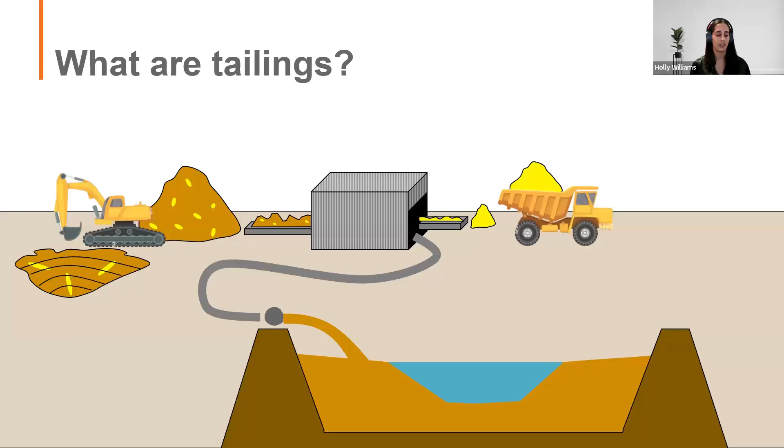So, all of us rely on mining to sustain our everyday lives, right? In order to get metals and minerals that we need to make computers, smartphones, solar panels, etc., we need to extract them from the earth. So whatever the metal or mineral is that we're interested in, in this case it's indicated by those cartoonish yellow specks. We first need to dig it up out of the ground. Then we have to process it to extract the thing that we're interested in and send it off for use in products. But, as you can see, those yellow specks were only a small portion of what we dug up.

And compared to other structures that need to be engineered seismically, some of the key differentiators or challenges with tailings facilities are that we actually build the structural dams out of earthen materials instead of manufactured ones. The stored tailings have high spatial and temporal variability. And the facilities themselves are never finished. They're usually continuously being constructed, raised, modified throughout their operation.

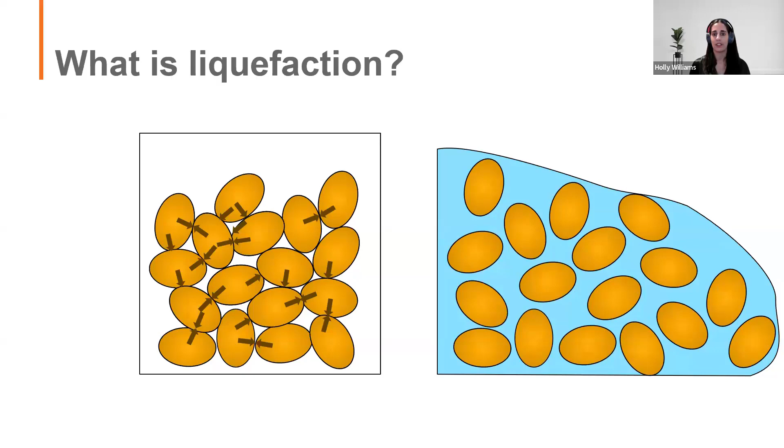But there are also some recent cases of flow liquefaction failures of tailings facilities that have led to devastating consequences. So I'm going to play a video of the 2019 Feijão tailings facility failure. And just to note, this tailings facility doesn't really look like the ones I showed you earlier. And that's because it had actually been inactive for a number of years and was covered and vegetated.

Another thing to note here is that the liquefaction here wasn't actually seismically triggered, but it is quite a unique case because we captured the onset of liquefaction on camera. So let me just press play here.

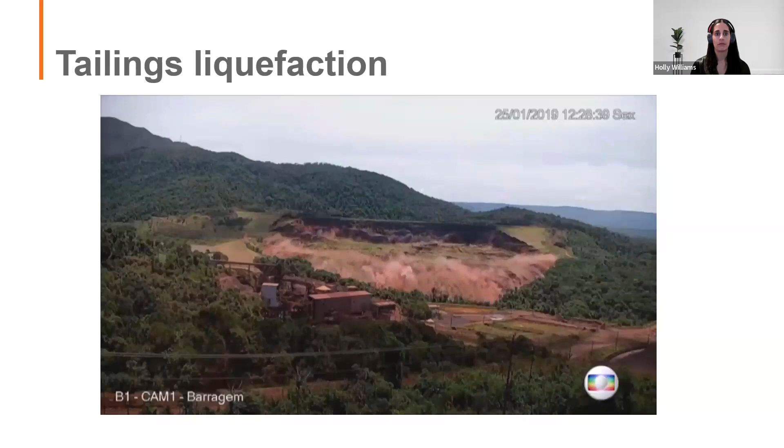So as you can see, this was a particularly terrifying example in the industry, especially because of how fast it occurred. So I think you can see why we're so concerned about this particular failure mechanism.

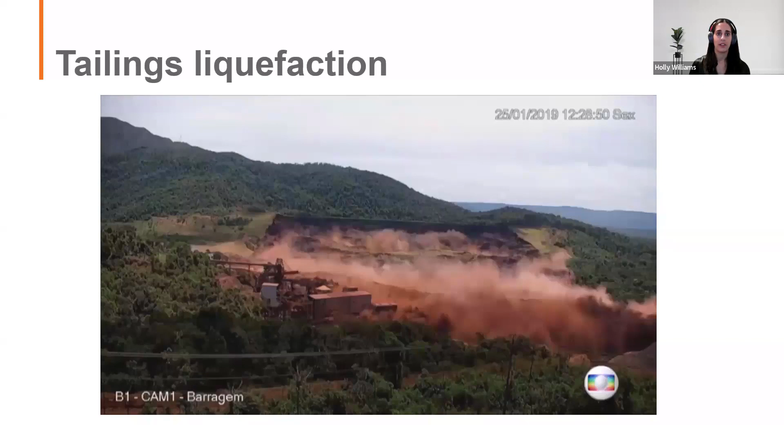And then lastly, some of the most common approaches to assess liquefaction potential in tailings are based on cone penetration testing or CPT. And the CPT is a long metal probe. We start pushing the probe at a constant speed. And as it's being pushed, it collects continuous readings of three things.

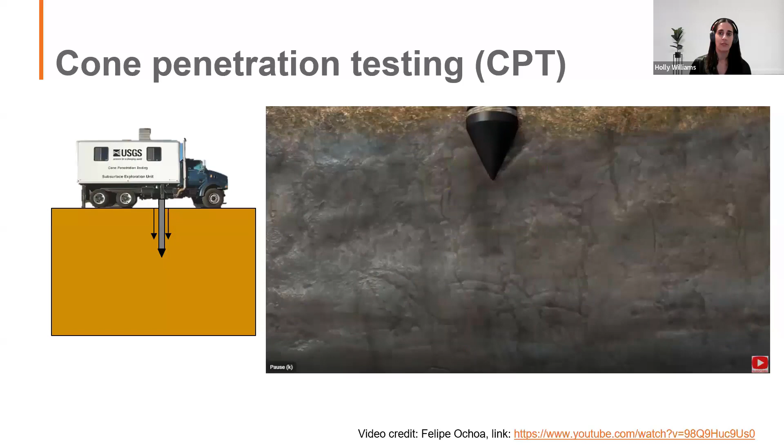Sorry, that video seemed to glitch. I'll see if it keeps going here.

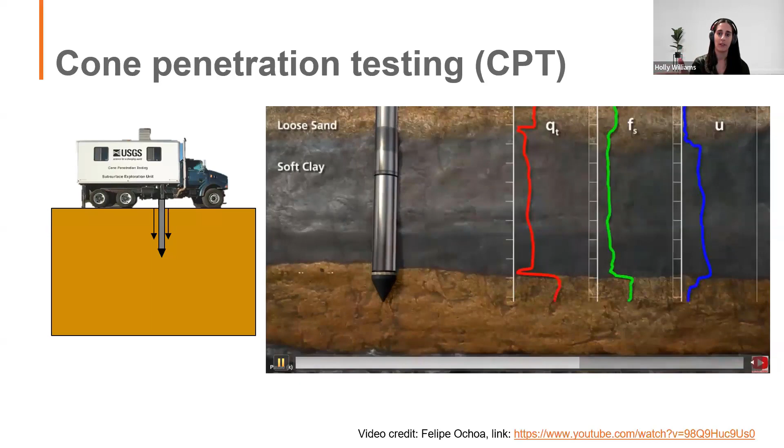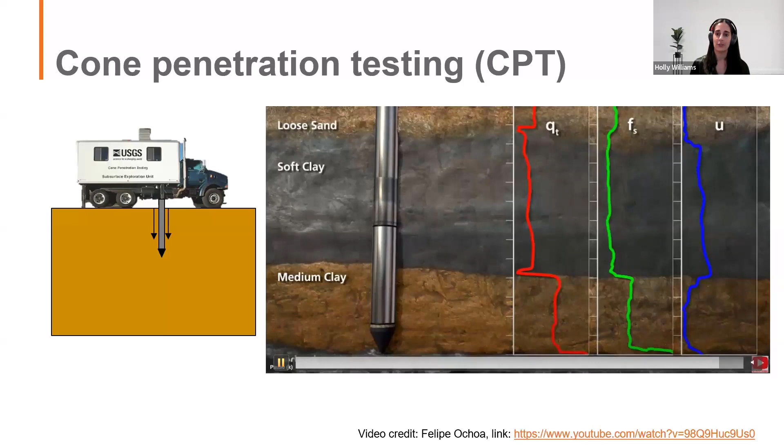Right. Yeah, so you can see how the combination of those three parameters gives us indications of when we're in different types of material. And we can use it to make inferences about its expected behavior. But something to keep in mind is that it does not directly measure the key parameters that we're interested in. So like when we were talking about liquefaction, that might be something like the actual in situ state of the soil or how loose it is.

So instead, what we need to do is rely on a combination of empirical equations and theory to get the parameters that we're interested in. So those are all the definitions, and now we can get into the key idea of the paper.

So for seismic liquefaction assessments for tailings, there are generally two steps. First, you do a triggering analysis to answer the question, which is really, will the material liquefy? And then once you do that, you run stability assessments using liquefied residual strengths in zones that you said were potentially liquefiable, and then verify whether the stability is acceptable. And then the results of both steps are typically presented as deterministic factors of safety.

And another thing to note is I recognize some people choose to vary these steps a little bit. So some people might skip ahead and do step 2 first to verify whether liquefaction is an issue before they even start to think about the triggering. Others include some additional steps or slight variants, but even with those variants, there are still 2 points in the process where you need to apply engineering judgment to select what is the cutoff factor of safety value.

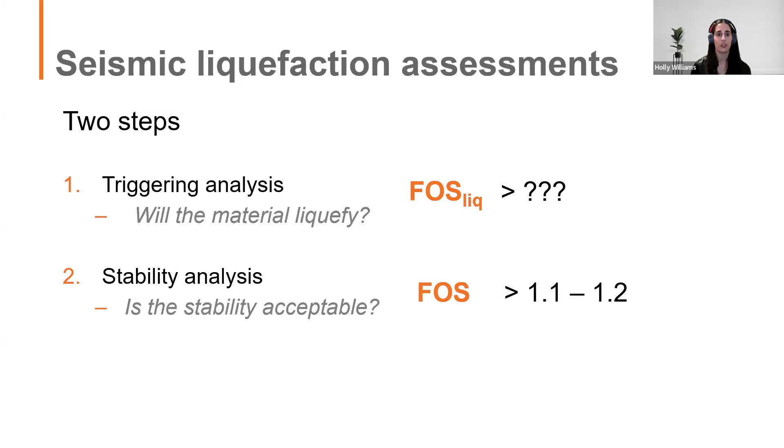We do have current best practice guidance that gives recommendations for factor of safety cutoffs for post-seismic stability. And those are typically around 1.1 to 1.2. But there isn't really established clear guidance on what cutoff factor of safety to use for the triggering of liquefaction.

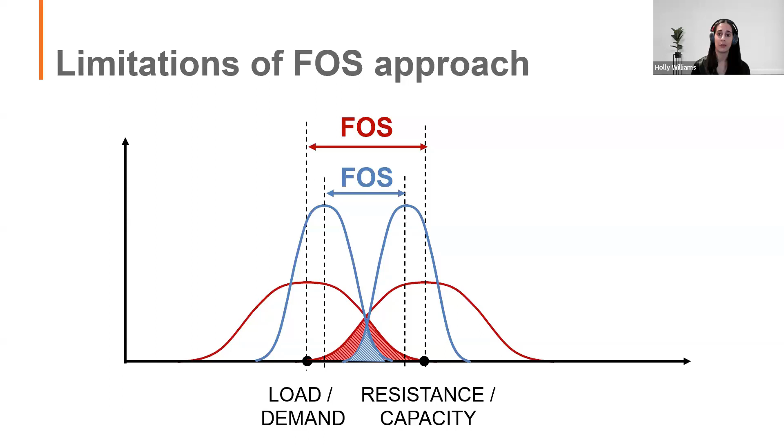And then here, what about another case where the red scenario will calculate a higher factor of safety, but has much more uncertainty and a relatively higher probability of failure compared to the blue scenario, which happens to have a slightly lower factor of safety. So I think this goes one step further and indicates that a higher factor of safety is not always indicative of a safer facility.

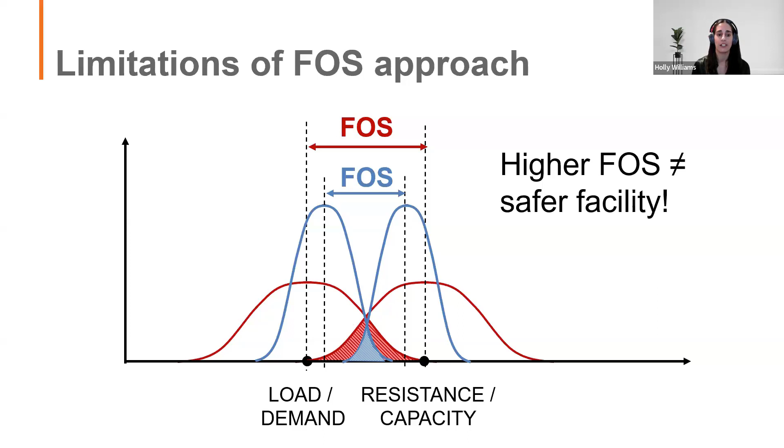So there are a number of different sources that can contribute to the width of those uncertainty bands that I just showed. First of all, the soil or tailings that we're interested in has variability. It's never perfectly homogeneous. Then there's error associated with the in situ testing method, as well as the level of site investigation and number of samples that we have, and scatter or variability in the information that we do collect.

And then, as we mentioned before, in situ testing, like CPTs, doesn't directly measure the parameters or inputs we need for our models. And instead, we need a transformation model to convert those in situ measurements to design inputs.

So it's pretty common to combine all of these types of uncertainties and call it the uncertainty of the measured property. And these are things that will vary site by site and will likely have opportunities to be reduced, either through additional investigations or improved measurement methods. But the transformation model uncertainty is something that is constant and irreducible when you use these methods.

In my experience anyway, I see that a lot of people relate uncertainties in strength properties that they use in their models to variations in the measurements that they collected. But we rarely see people accounting for the transformation model uncertainty, despite the fact that it can be just as significant, if not more so, especially when we're using models that rely on multiple empirical correlations. So that really was the focus of this work, to show how this type of often ignored transformation model uncertainty is really important to engineers who are making decisions about liquefaction stability.

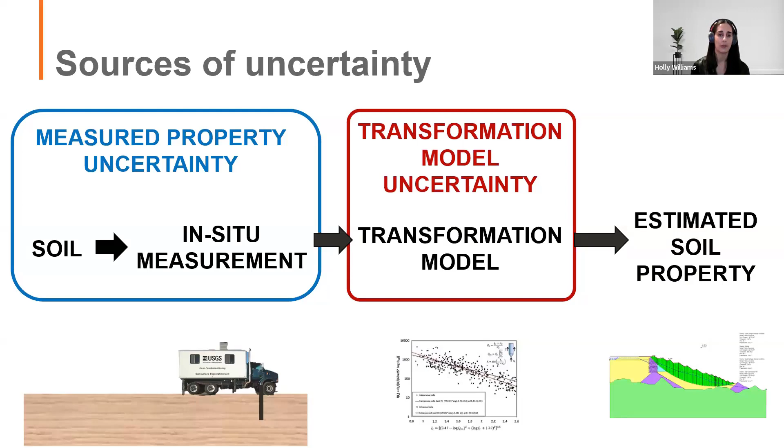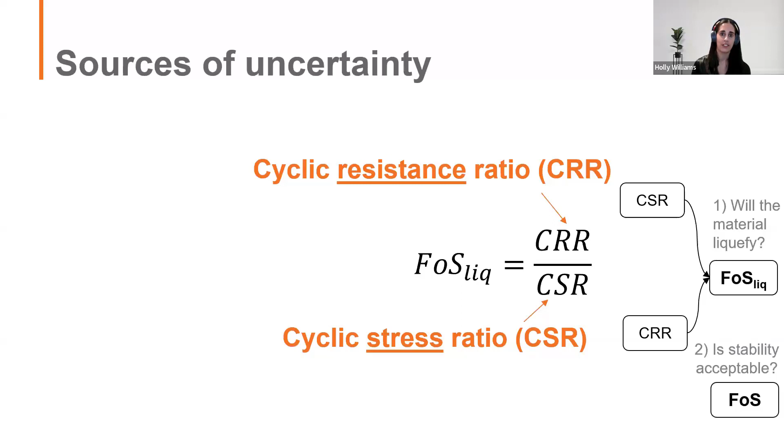So again, I mentioned that these were the 2 key steps in liquefaction assessments, and they each have different sources of uncertainty. So for the factor of safety against liquefaction triggering, it's most common to calculate it as the ratio of cyclic resistance, or CRR, to cyclic stress, CSR. And then, if liquefaction is triggered, the post-liquefaction stability will depend mostly on the liquefied residual shear strengths that are estimated.

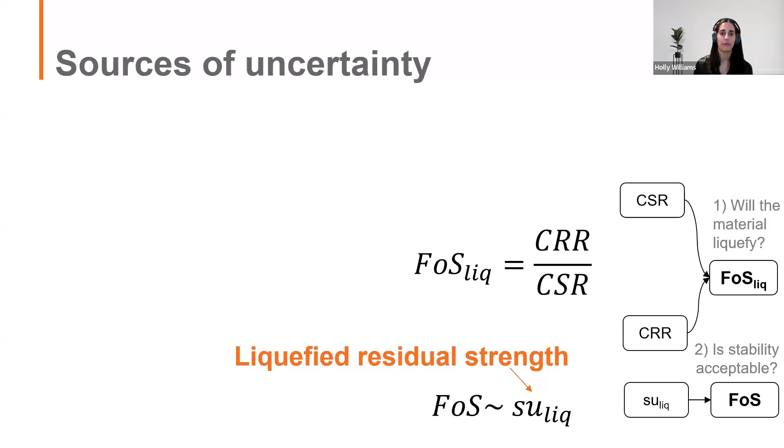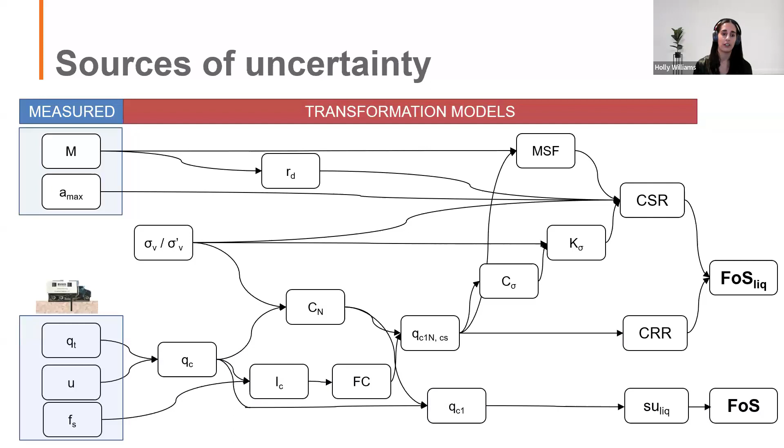So in this paper and talk, I'm using the Idriss and Boulanger framework as an example, just because it's one of the most widely used. You should note that there are others as well. They vary slightly, but they all have a similar framework overall. And the key to all those empirical frameworks is that they look at historical case histories where they have known seismic events or estimated CSR values. They have CPT data, and then they have observations of whether or not liquefaction occurred. So then they estimate a CRR relationship as a line that best separates liquefied from non-liquefied case histories.

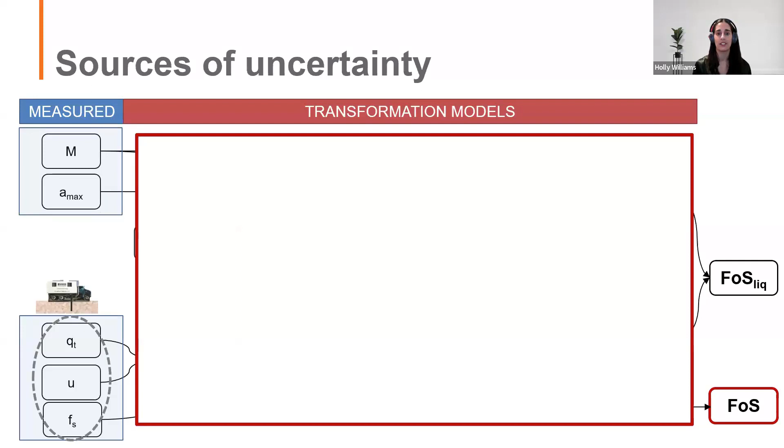Okay, so now let's look at the transformation model for the second step. Because it's sometimes difficult to extract and test undisturbed samples, empirical CPT procedures are also widely used to estimate liquefied residual shear strengths. Here, I'm showing Olson and Stark's method, but again, there are others. But the key is that most methods actually use the same database of about 33 case histories. And those case histories aren't super well documented and require a great deal of judgment to develop correlations linking CPT measurements to back-calculated liquefied shear strengths. So all methods have the same two key uncertainties: the CPT resistance, and the strength transformation model.

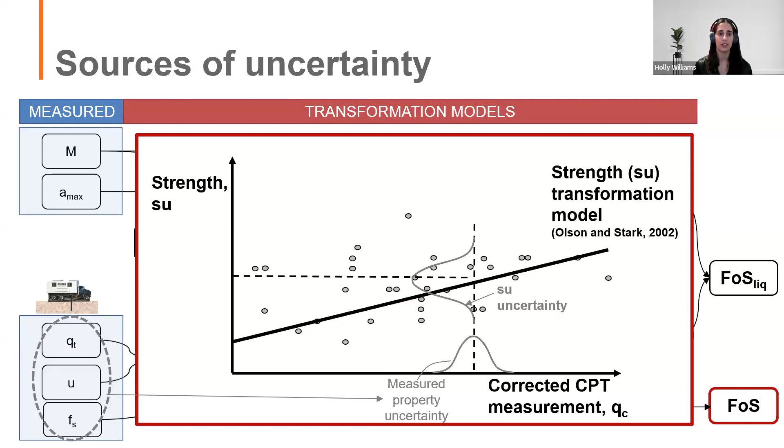So the key idea of the paper was that since we know the uncertainty in the transformation models and the other measured properties, we can just do a bit of math and calculate how those uncertainties translate to any factors of safety that we estimate using those methods. And then once we know the uncertainty associated with the factor of safety, we can calculate the probability of failure, which is just the probability of the factor of safety being below 1, which can help us with making more risk-informed decisions.

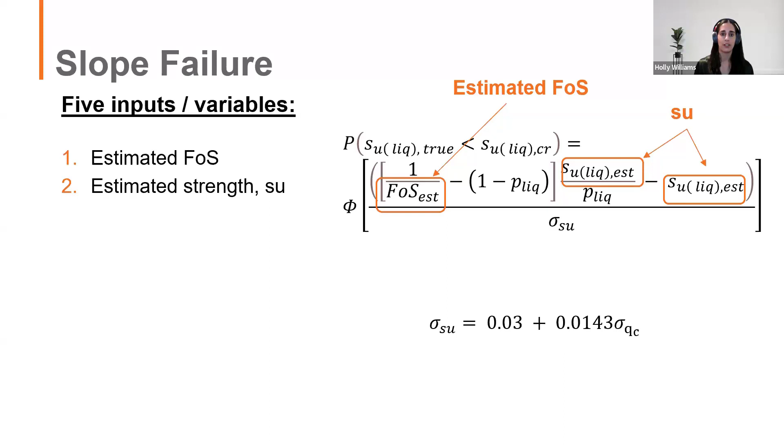We can also apply a similar process to the second step, where we're interested in estimating the post-liquefaction stability. And now in this case, we have 2 equations with 5 key inputs. So again, the estimated factor of safety, the estimated residual liquefied strength ratio that we use, the variability in the measured CPT tip resistance, the uncertainty in the transformation model used to estimate those residual liquefied strengths, which in this example, when we use Olson and Stark, is a known and constant 0.03. And then the proportion of resisting force contributed by liquefied materials.

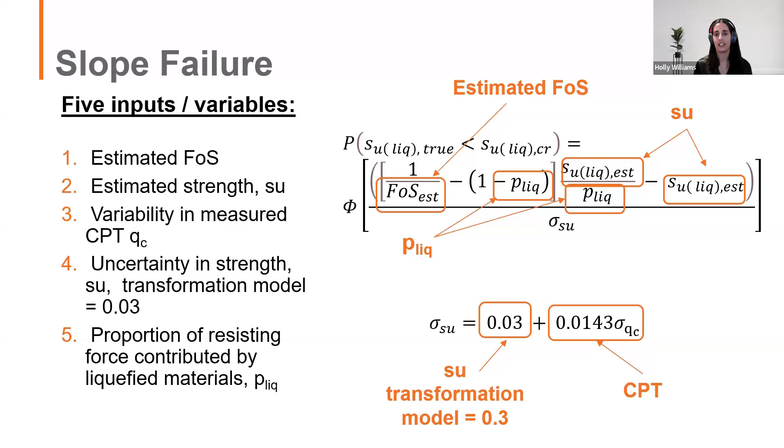This is because we need to account for the fact that some of the area that's going to be part of the global failure surface is from materials that aren't liquefiable. So there's not just a direct linear relationship between the liquefied strength ratio that you use and factor of safety. It depends on what proportion is actually from liquefiable materials.

But one of the most interesting observations, to me at least, is the relatively high probabilities of failure that are associated with a factor of safety of 1.1, which is the typical value recommended by some dam regulators like the CDA. And this really shows me that the use of a constant factor of safety cutoff does not necessarily represent the true risks.

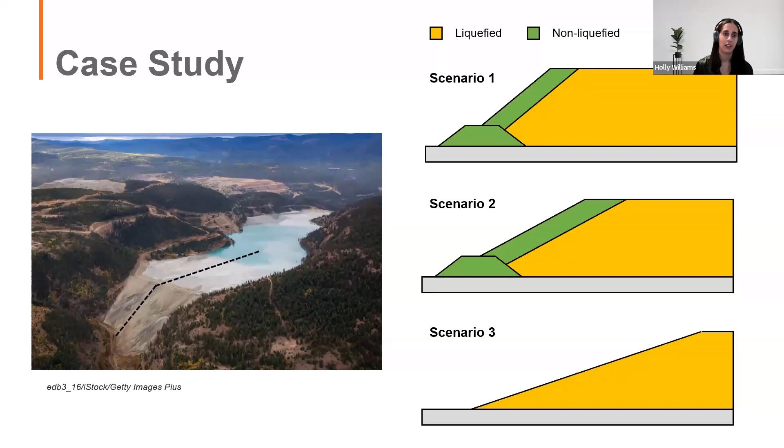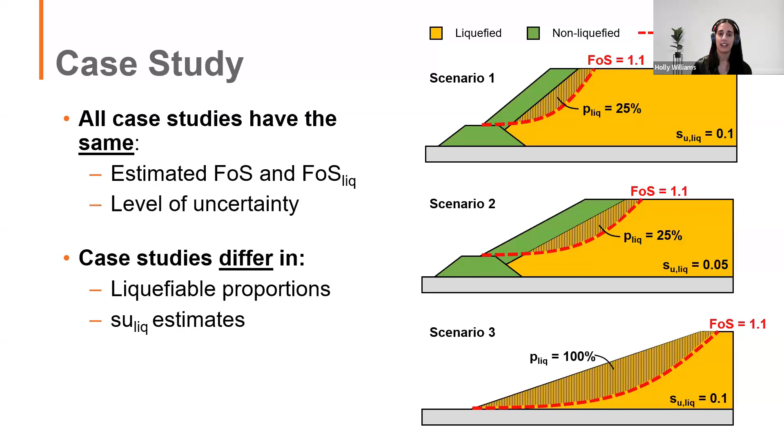In this illustrative case, all three of these examples had a factor of safety of 1 for liquefaction triggering, and then a factor of safety of 1.1 for post-liquefaction stability. It was also assumed that they all have the same degree of base knowledge or uncertainties, and they all have potential to reduce those uncertainties through additional investigations or lab testing. But the case studies differ in their geometry, in the proportions of liquefiable material, and in the residual liquefied strength ratio estimates.

And just as a reminder, again, these are the four key uncertainties. So the CPT tip resistance or variability in the tip resistance. And it's assumed that this uncertainty could be reduced through additional CPT investigations and/or calibration index testing. Then the seismic hazard or CSR uncertainty, which can be reduced by performing rigorous site-specific hazard assessments and including strong ground motion stations directly at the site.

The uncertainty in the CRR transformation model, which is actually fixed and can't be reduced. And then finally, the uncertainty in the CPT-based liquefied strength transformation model, which can be reduced by performing laboratory testing rather than relying purely on the empirical CPT relationships.

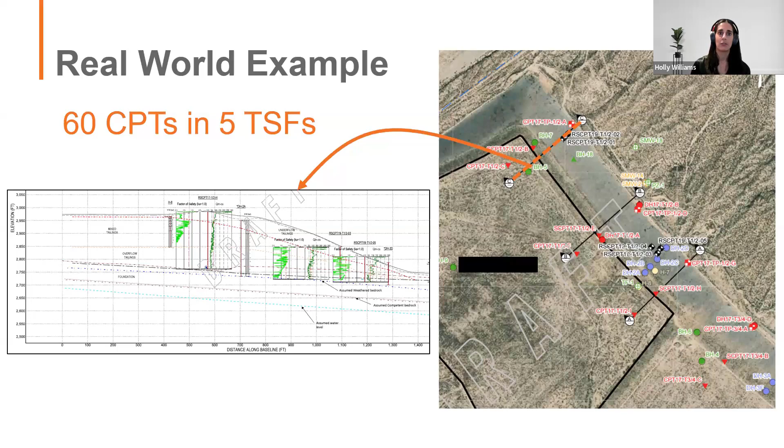Some recent site investigations included about 60 CPTs on the 5 tailings facilities there at the site. Here's just an example of one cross-section. The engineer of record here computed the factor of safety against liquefaction triggering using the CPT results and Idriss and Boulanger's deterministic CPT relationship. And they actually made the decision to use 1.2 as a cutoff. So zones with factor of safety less than 1.2 were what was considered potentially liquefiable.

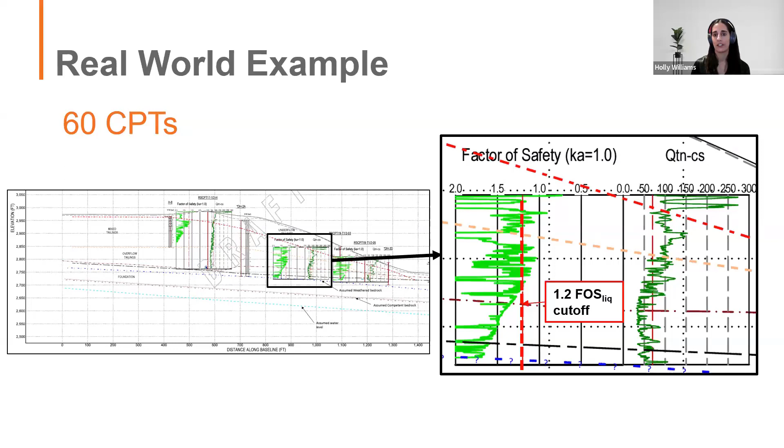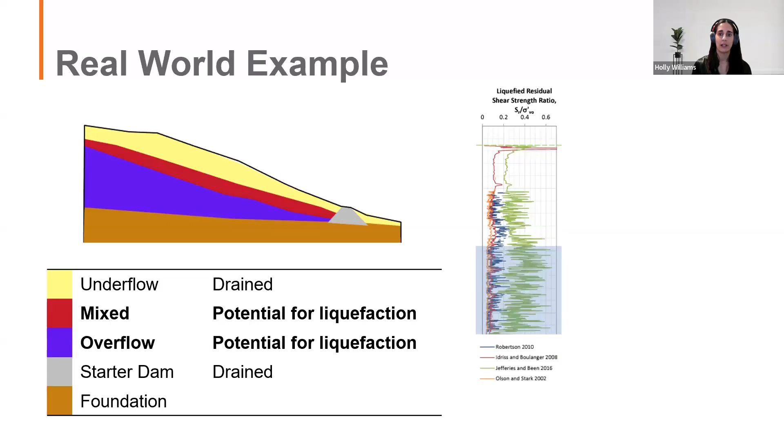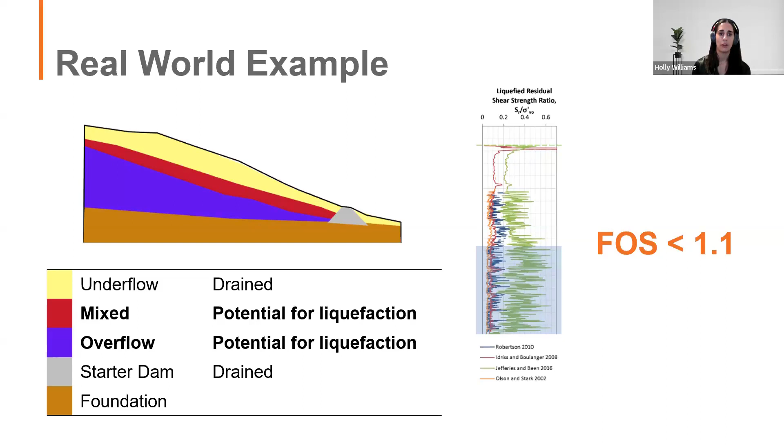And so this is sort of a generalized interpreted cross-section of what they came up with based on those results. The bluish and reddish areas were the zones that were considered susceptible to liquefaction. They also used CPT methods to estimate liquefied residual strength ratios. In this particular case, they adopted Robertson's values in their stability analysis. And then those analyses showed that all facilities had post-seismic factors of safety below 1.1. So even though the facilities met best practice criteria when they were closed, there's now a concern that they don't meet current liquefaction stability requirements.

A buttress was designed that would get to factors of safety above 1.1 or 1.2, and that buttress was significant, had costs in the hundreds of millions of dollars. And it's also worth noting that this is a mining client that owns and operates a number of other tailings facilities around the world, some of which also might not meet current liquefaction stability requirements and may also require buttressing. So we were approached by them and they asked us to help them assess and understand their liquefaction risks, basically to help inform decisions that they need to make on the urgency and size of a buttress that might be needed.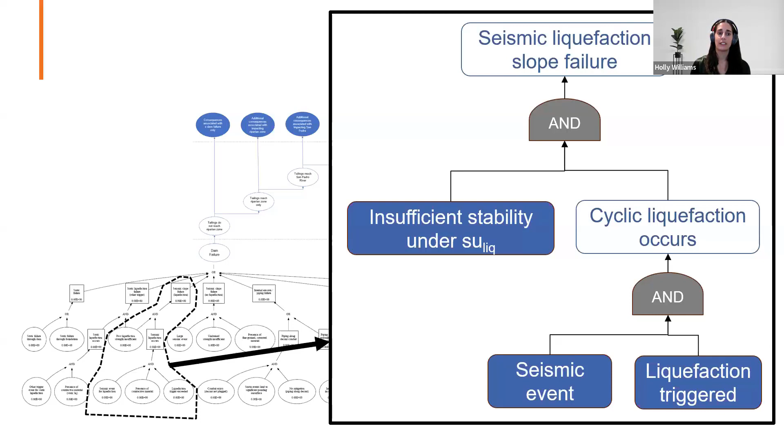So for this type of failure, we need the material to liquefy and then to have insufficient stability under those liquefied strengths. And the probability of liquefaction occurring depends on both the seismic event and the probability of liquefaction being triggered for that event. And these may seem familiar because they're essentially the same steps we talk about in the paper. So we can apply the paper methodology, but incorporating the site-specific information to calculate the probabilities for these different nodes. But this is just one dam failure mode. And we also have similar trees for all these other failure modes. And we included these other types of failure modes because even though the client raised liquefaction risks as the primary concern, we want to make sure that we don't ignore other risks that could be of equal or maybe even higher significance.

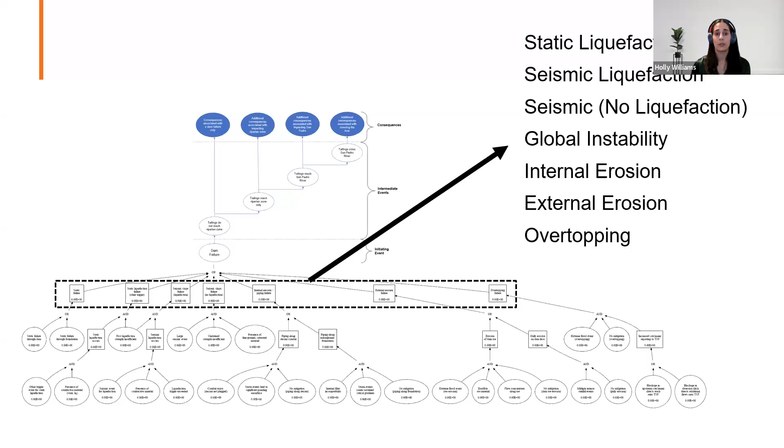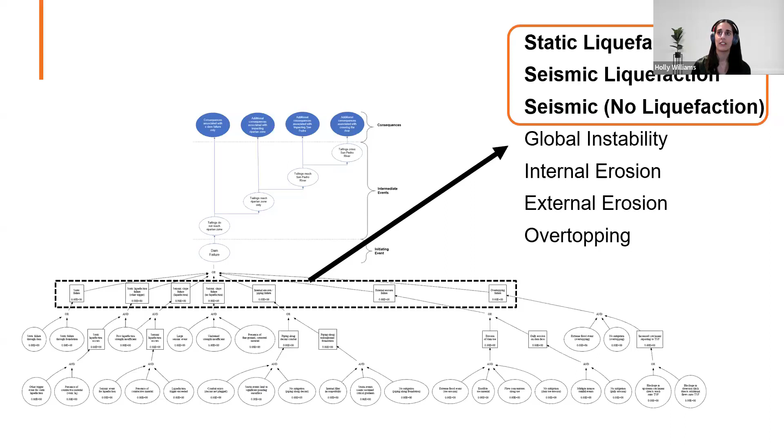And actually, some of the paper calculations, like those relating to uncertainty in the residual strength estimates and in estimating liquefaction triggering potential, can also be applied to these other failure modes too. And so now let's look at the results.

And then another common way to look at results of QRA is to plot them on these FN plots. So the N is the consequence in terms of number of fatalities, which is shown on the x-axis. The F is the frequency or annual probability of exceeding that consequence, which is shown on the y-axis. And one of the challenges with QRA or probabilistic approaches is that it's always hard to know what to compare to. So the different gray dashed lines on the chart represent a range of proposed tolerability thresholds, which can vary from different regions or jurisdictions.

So here, with the white symbols, I'm showing the base case results for 2 of the TSFs in their current condition. So you can see the circle there, that plots just above all thresholds, whereas the diamond plots well below 2 of the thresholds and quite close to the 3rd. We also looked at the effect of the planned buttress, which reduces the risk for both facilities. For the circle, it goes from being above all tolerability thresholds to below 2 of them. And for the other facility, it shifts it down below even the negligible risk line.

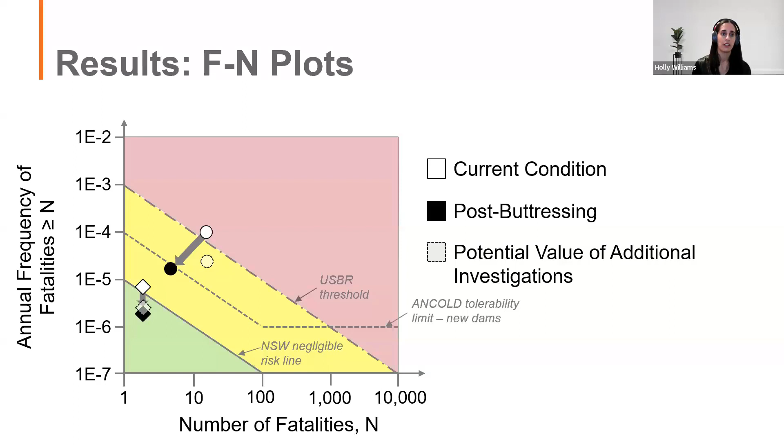So now to wrap up, here are what I think are the key contributions of this work. First, it described the different sources of uncertainty in liquefaction assessments and how to quantify them. And it also demonstrated how the often ignored transformation model uncertainties can be quite significant.

And I think this has a few implications. First, the implications for deterministic factor of safety-based approaches or estimates. I know you're probably already well aware of the many limitations of purely deterministic approaches. And I think this study simply pointed out another weakness of these methods, right? Sort of emphasizing, especially when they rely heavily on empirical correlations that have high uncertainties in their underlying transformation models.

Next, implications for CPT uses. Actually, I want to pause here and make it very clear. I don't intend for this presentation to be a criticism of CPTs at all. I'm a big fan of CPTs and think they're obviously a very efficient screening tool and great at providing coverage for characterizing large areas. Instead, I think this paper is just trying to point out some of the big uncertainties underlying some key CPT correlations, and to recognize the risks of relying too heavily on them.

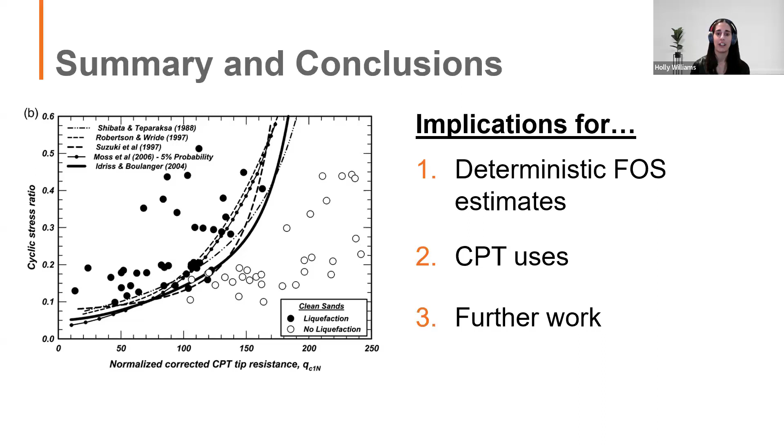And just to conclude, as I said before, even though this is one specific example, these types of uncertainties apply to every parameter derived through empirical correlation methods, which I think are used widely across many areas of civil and seismic engineering. So I think now as we next move into the questions and discussion part of this webinar, I'd be very interested to hear from you and whether you see any parallels or relevance to your work. Thank you.

Thank you very much, Holly. Really interesting presentation. I think it's very educational in the way that you presented, and interesting cases that you showed. I see a lot of parallel on the work that I do every day. My field of work is mainly probabilistic seismic hazard assessment, where everything is about accounting for uncertainties and seeing how those uncertainties or additional data could help to better characterize the risk, or the hazard in my case in specific.

And actually I would have one question. I would like to start with a question from me. In the cases that you were presenting, always if you add data, you will reduce risk or you will reduce uncertainty. But that is not always the case. Sometimes we acquire more data and we realize that the case is even worse than we thought at the beginning.